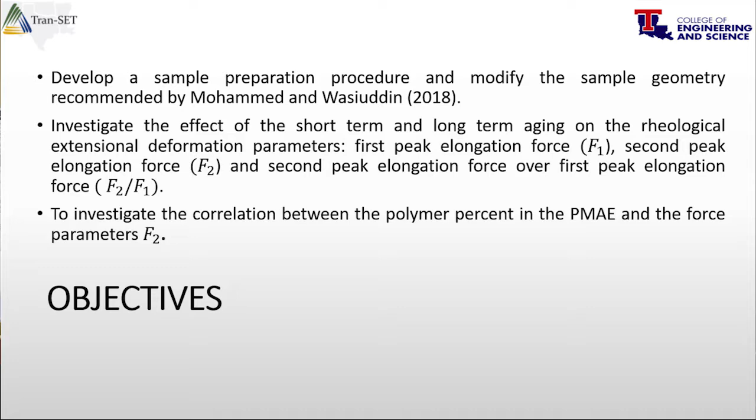We presented a new method that actually captures the second force peak. I'll explain a little bit later what I mean by second peak. So we were able to characterize that one. So that's the second project.

And the third project we're doing is actually with Tran-SET, where we would like to incorporate into the PG specifications some of the properties, because everyone uses polymer nowadays. Polymer modified binders are very common, and how polymer behaves or how polymer degrades with time. We know that PG tests were developed on neat binder, not polymer binder. Now everyone is using polymer, so how does that polymer change? So we need to characterize the polymer's life and its performance.

So that's why we initiated this project, where we are doing aging in polymer, because that's one of the common degradation processes during its life. So we are aging polymer modified binder and we are looking at the force peaks, the first force and the second force, and the ratio of the second over the first one. I will explain why second over first.

And then also, does this second peak or this type of extensional behavior in any way correlate with the polymer content or not? Can we use this test extensively?

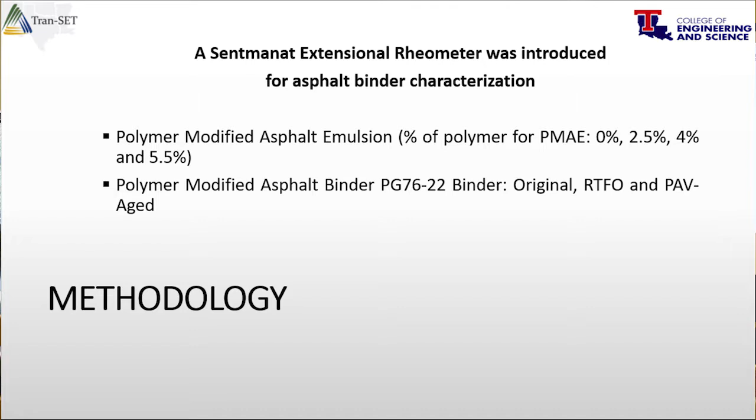So we did that, and we used polymer modified asphalt emulsion that has 0%, 2.5%, 4%, and 5.5% polymer. And we also used polymer modified asphalt binder, which is PG76-22, and we aged that: original, RTFO, and PAV aged. Here we just checked how our forces are changing with respect to percent of polymer, so that we can use this test to know how much polymer is really there in the film. And then this one is how with aging our force peaks change.

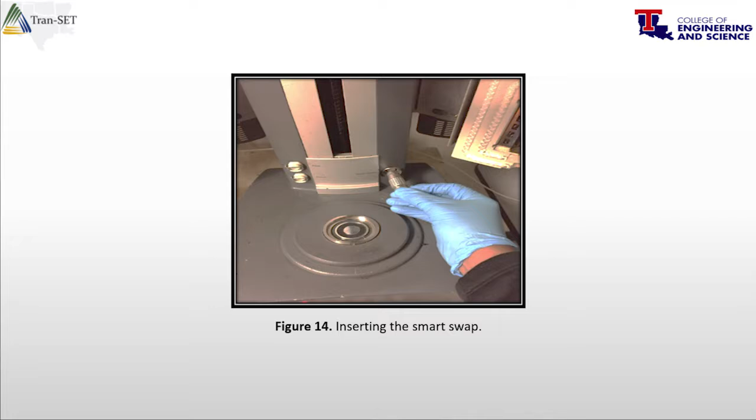You can see this SER, extensional rheometer. It has a smart swap, so you just plug this one in so that it knows it changed from the DSR format to the SER format. Then you fix the SER bracket. This is the SER fixture, the extensional rheometer fixture. You screw it up with that, and as you can see, this is your oil, this is your rheometer, this is your rheometer oven, and this is the shaft. This is the bracket first.

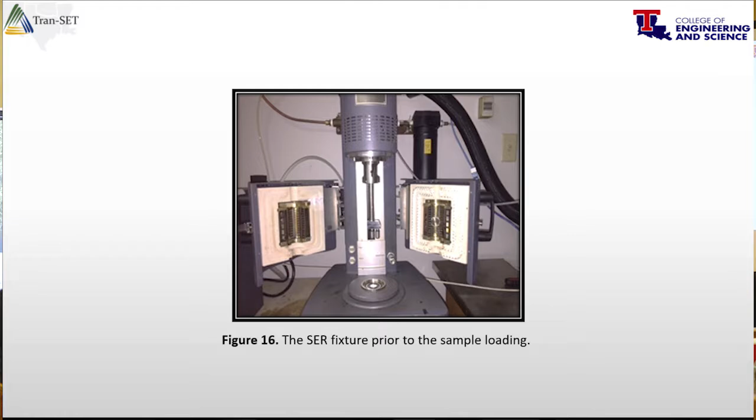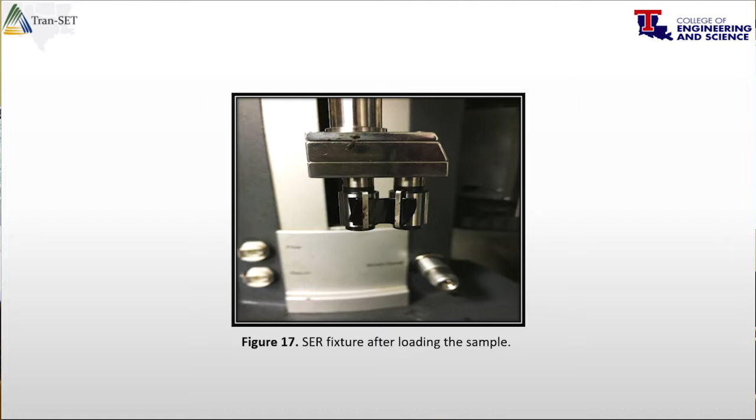You connect it to this one, then you connect this shaft, and you have two drums here, and those two drums rotate, as you realize when you see the sample placed. You see now there are two drums. You place the sample here, you put the staple here, and then you just plug in the staple here and here. So this height is always fixed.

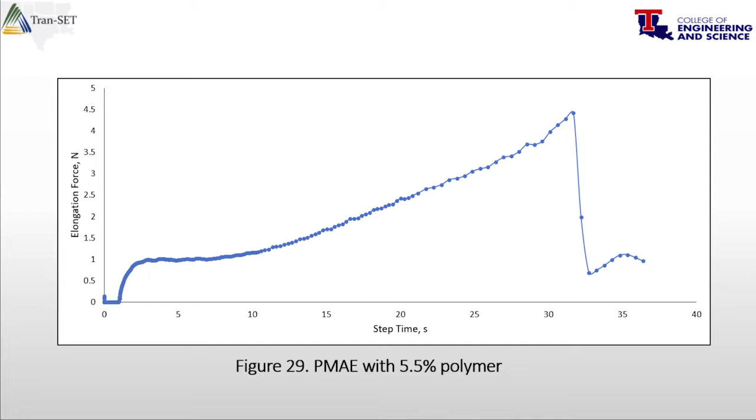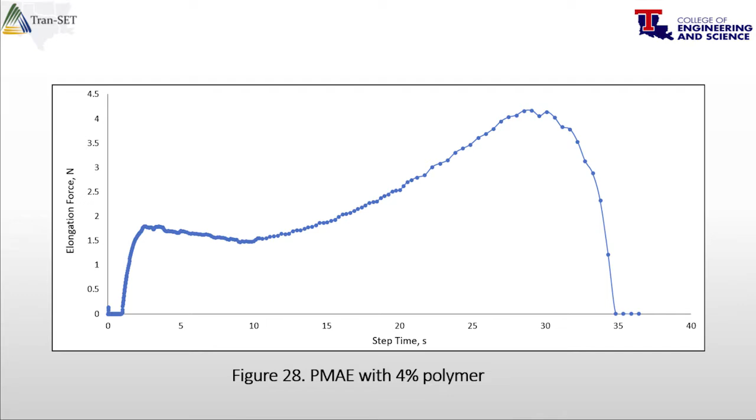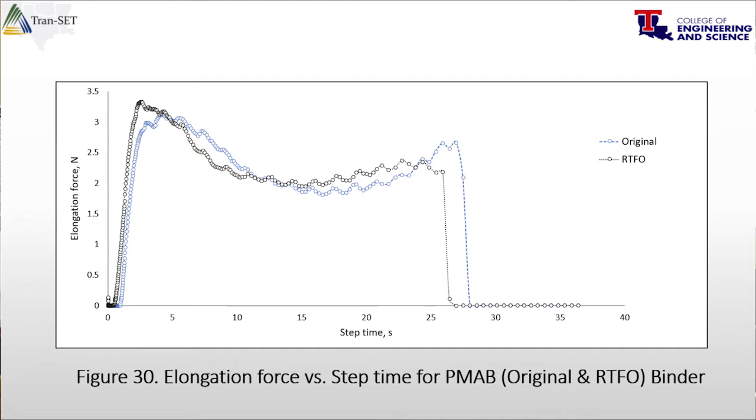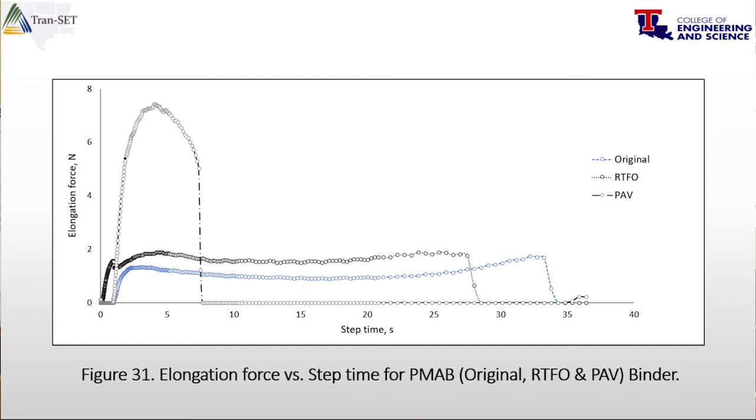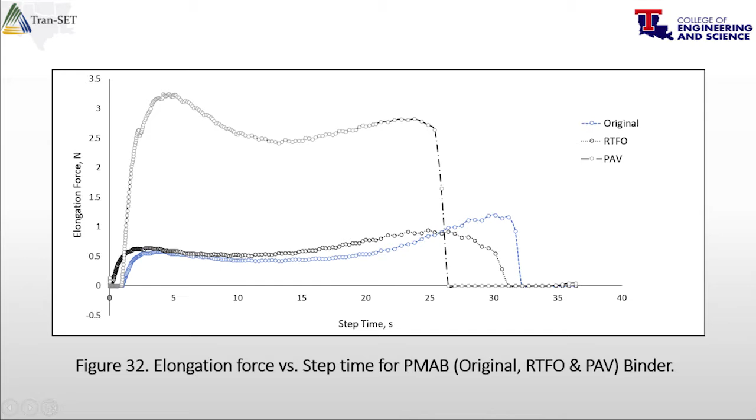And then this is the data at 4 degrees Celsius. We can see that this is the original binder, this is the RTFO aged binder, and the PAV did not show any second force peak. In this case, same thing at higher temperature. This is the original binder, then the RTFO, and then the PAV. And then I'll move to this one directly because I don't have time.

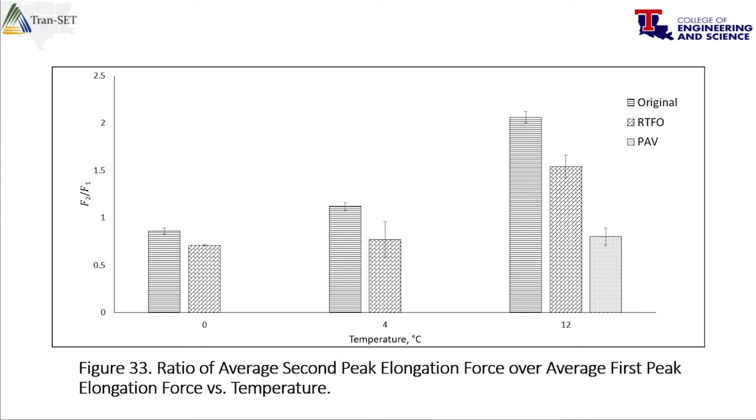This is 0 degrees Celsius. You can see that for the original binder, F2 over F1 reduced. At 4 degrees Celsius, it reduced. And at 12 degrees Celsius, we are just changing temperature to see if the trend is the same. But as I always show you, as you increase temperature, the polymer effect is more visible. No matter whether you do DSR or extensional deformation, the polymer effect is more visible at high temperature. So as you can see, F2 over F1 reduced significantly.

And this is the polymer content. We have the results for different percents of polymer as I showed you, and you can see that we have a good R-square value, but still we have some repeatability issues that we are working on, as you can see from the error bars. So we are still working on these.

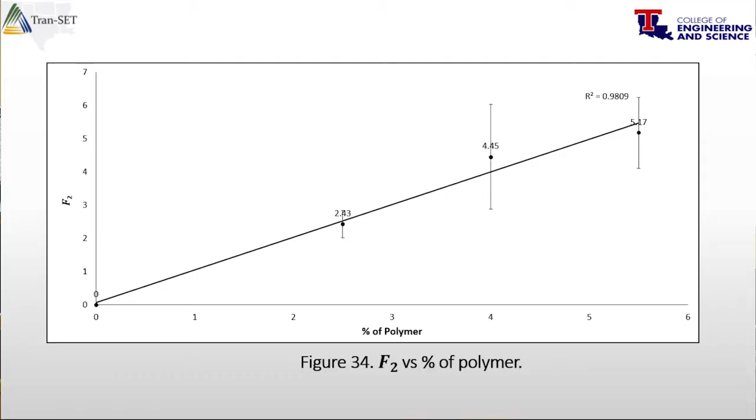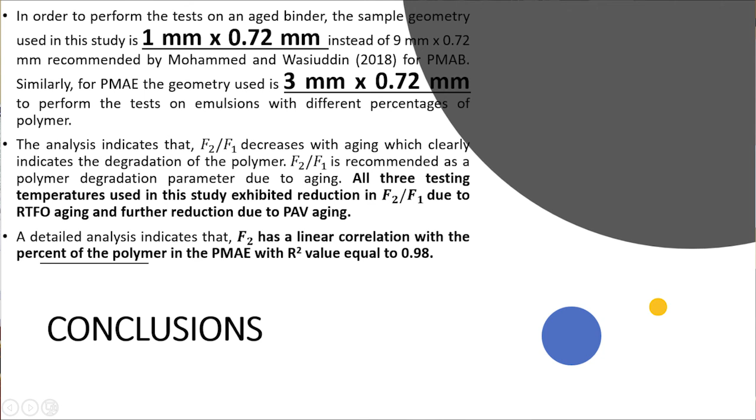Actually done. We used 2 different types of samples, and we have results that linearly correlate with percent of polymer, and F2 over F1 actually reduces with aging, showing that the polymer degrades with temperature and aging.